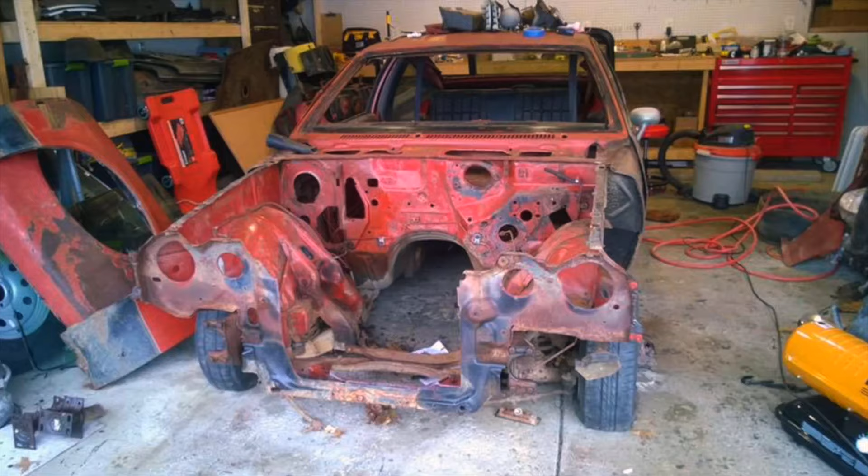And that's not the green car either. That's my Formula, which has been evicted from the garage for the moment. Don't look at Granny's pad. And well, hey, no green car in here either.

So if you've been following me for any length of time, you know this garage has been kind of an ongoing project, and finally the drywall's up, first coat of tape and mud is in. Hopefully it'll be done in the next few days here, and then we can get out here and paint.

But where's the green car? Well, Bill's still down at Bill's. I'm up here in Northeast Ohio. Bill is down in Tennessee, about 9 hours from me, and he's continued to work on the project. So thanks to Bill, the car is making some progress. This is just kind of a little intro video for what Bill has gotten done. He's got the headers in, and he made the transmission torque arm transmission crossmember piece. So without further ado, I'll send this over to Bill and he'll tell you the update.

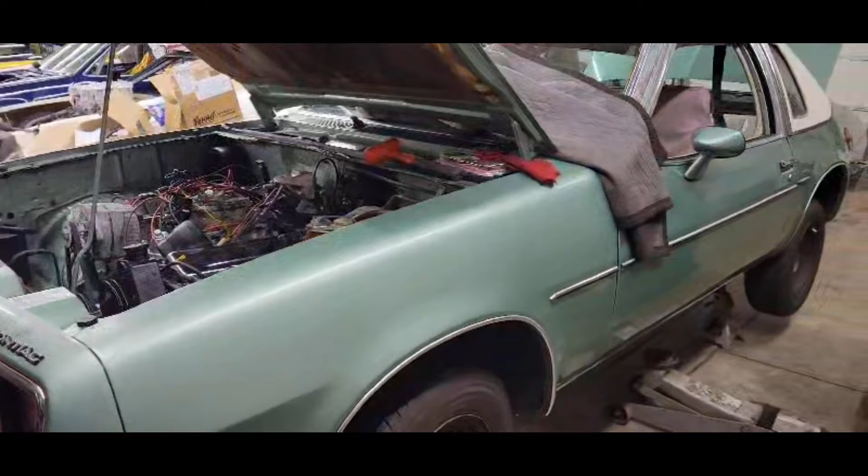All right, everybody, here's a little update on Kevin's high school car rebuild. And I know we were calling it Oscar because we were looking for something green, but I think we've changed her name because she's a she, so we went with the only other obvious green she I could think of, which is Fiona, Princess Fiona from Shrek. So it's perfectly ugly and a great name for this car.

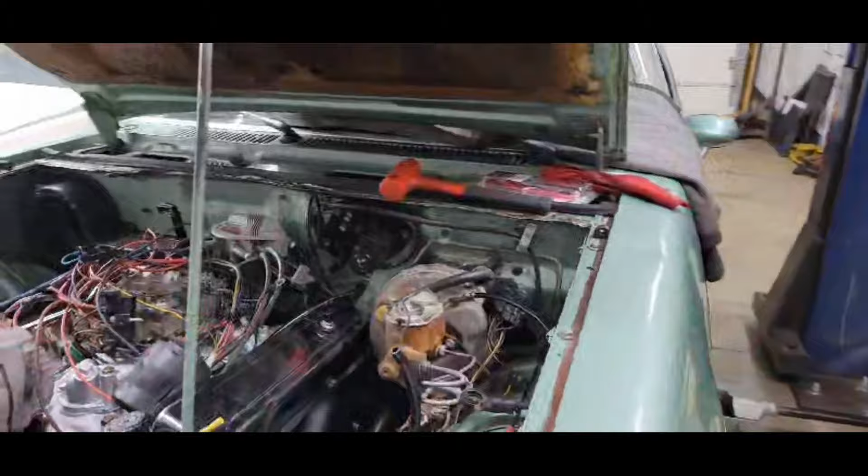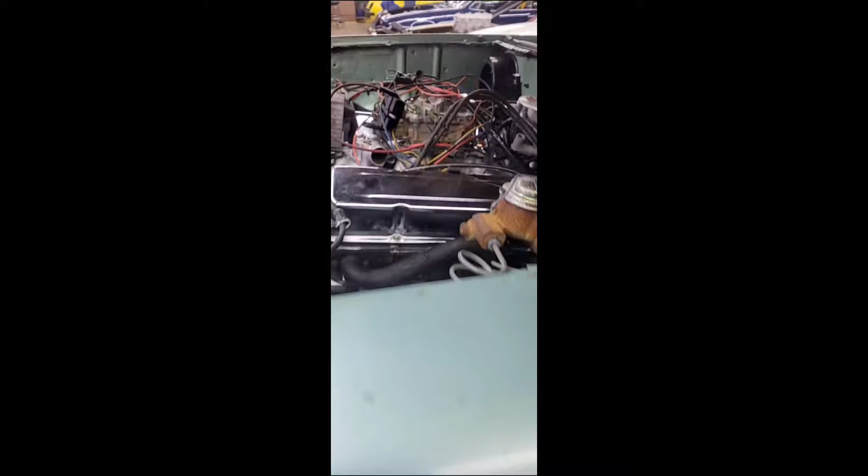So with that, I want to give a quick update where I'm at. After fighting and fighting and fighting, I have successfully installed the headers on both sides. They're in there. It's on. But I got it. These are horrible to install.

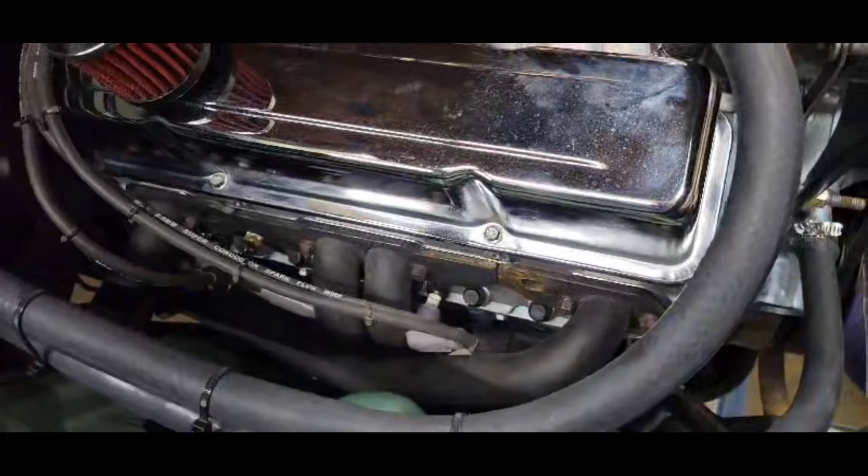Never recommend anybody ever use these headers ever again. But Kevin had these on his car in high school, so he wanted them back on his car, and I understand that, I can respect that. But the headers are on. I've got the heater hoses on, as you can see. I got spark plugs on this side, wires are back on this side.

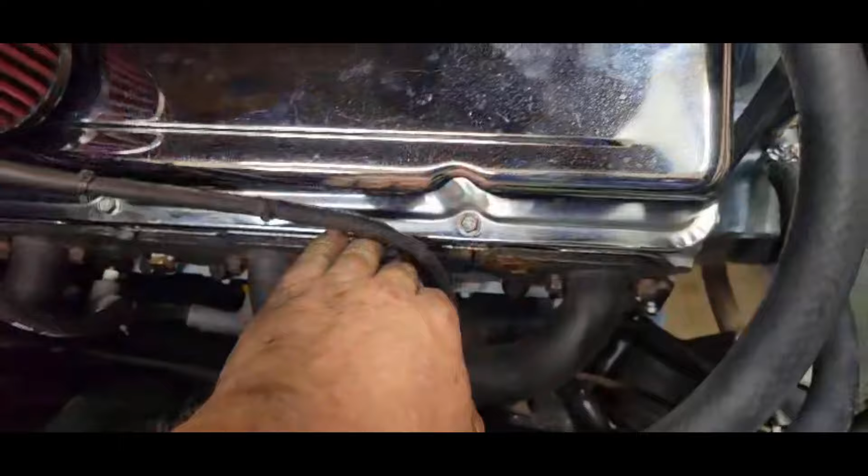I do have to come up with a clamp of some kind to attach it over there, so I can move the front of the breather here. The breather's in the way. I wanted to come around the other way, I just have to fool with it. But I'd like to have it attached to maybe this bolt here with a clip so that they don't touch the headers as much as I can stop.

And what else did I get done? I got the transmission cross member in. That's another video, so I will leave that out of this comment for this quick little video. But I'm working now on, I also got the motor mounts in.

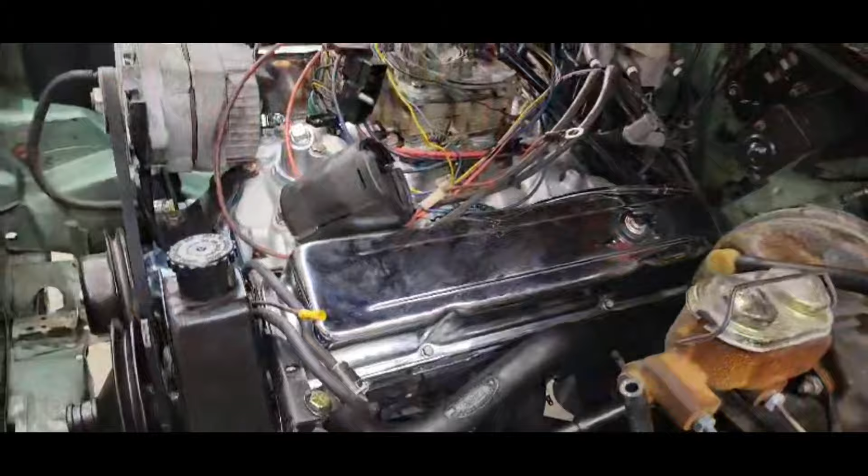I had to take them out to get the headers in. I also had to take the steering box out. I didn't have to, but I thought I did. So I got the steering box back on, the steering arms back attached. That's back together. The motor mounts are in on both sides. As I said, the transmission is in. The cross member is in.

So it's coming along. He's got me some more parts came in. I got the gauges and a gauge mount, so I need that to fill the holes, and I really don't want to start it up without knowing the oil pressure and the water temperature are accurate. Let's do it right and do it once. Needs to do it anyway, so let's just do this.

So I'm going to probably put those right here above, below the radio, between the radio and the shifter. Maybe they'll have to go over to the left a little bit more, but I like them over there. It's easier to see there. So that's the plan for that. Might start tackling that later.

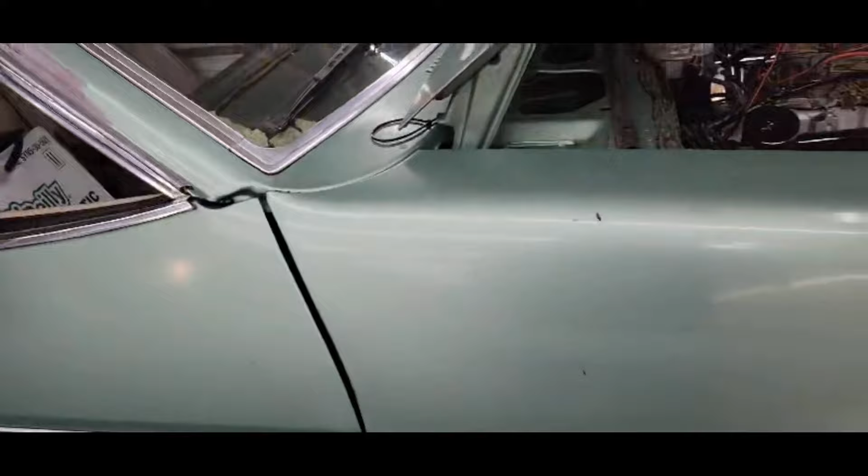I still have to put the drive shaft in. Like I said, I got the cross member in, but it's going to be the next video. So with that, I'm going to end this video, and we're going to start the next one.

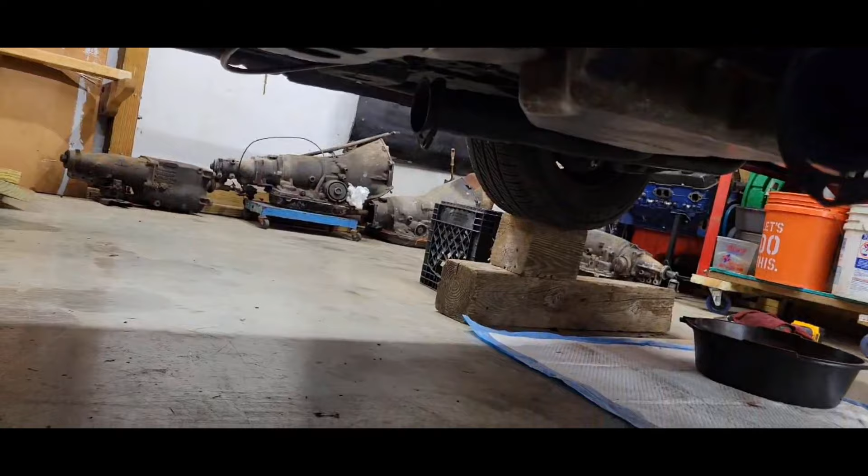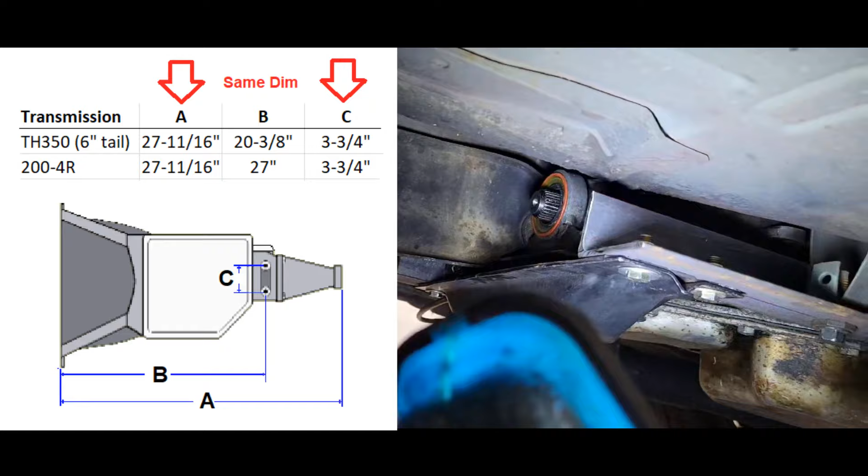Okay, back to the transmission cross member. Now, basically, I'm going to give you a quick lesson. The 200-4R is what we put in here, and from bell housing to tail housing, it is exactly the same length as the 350 — the Turbo Hydromatic 350. And of course, my compressor kicked in.

I just realized I really need to explain this torque arm mount a little bit better than what I did. That torque arm up in there.

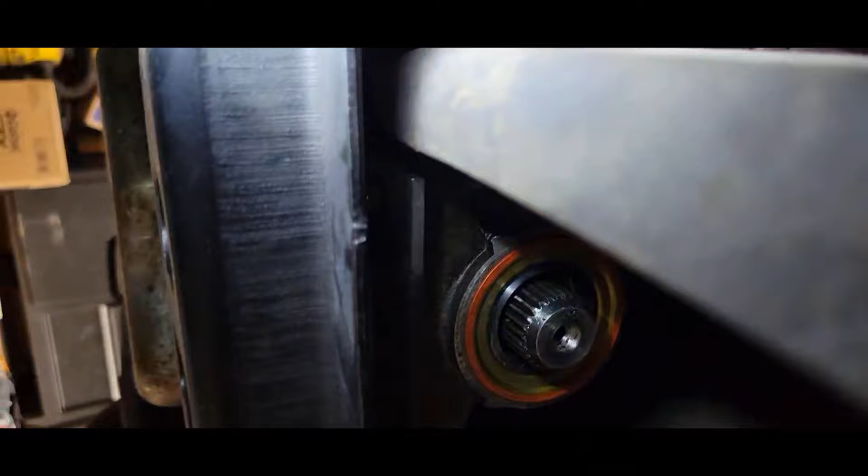Trying to get better lighting in for you.

See how that's mounted? That bracket where the bolt goes through the torque arm - normally the bolt goes from the transmission to it, and the nut goes on this end basically, and the bracket's all reversed, and this goes to the transmission. It's hard to film this.

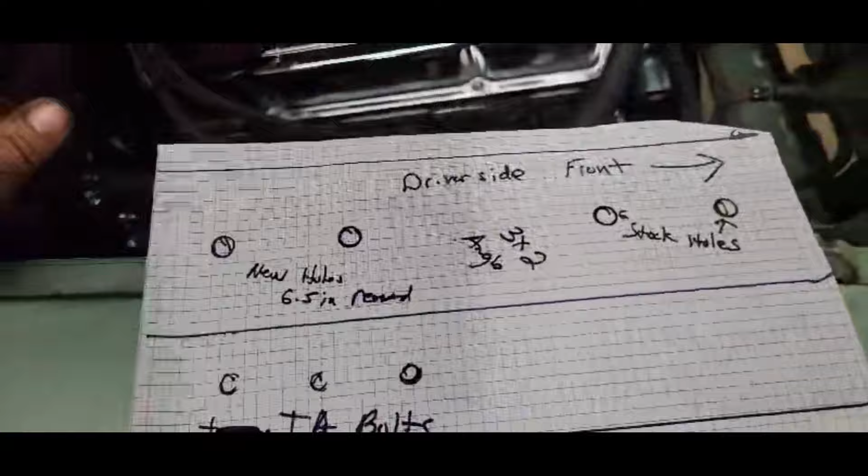It's hard for you to see that, I'm sorry. But it basically goes - I'm going to redo this. Okay everybody, I'm going to try to refilm this again. I just started to film and my compressor kicked on, of course, just the way timing always works.

Okay, what I'm going to talk about tonight is installing a 200R4, a 4R, whatever you want to call it, into an H-body. Now it is exactly the same length as a 200, a Turbo 350, or a 4-speed. They're all the same length.

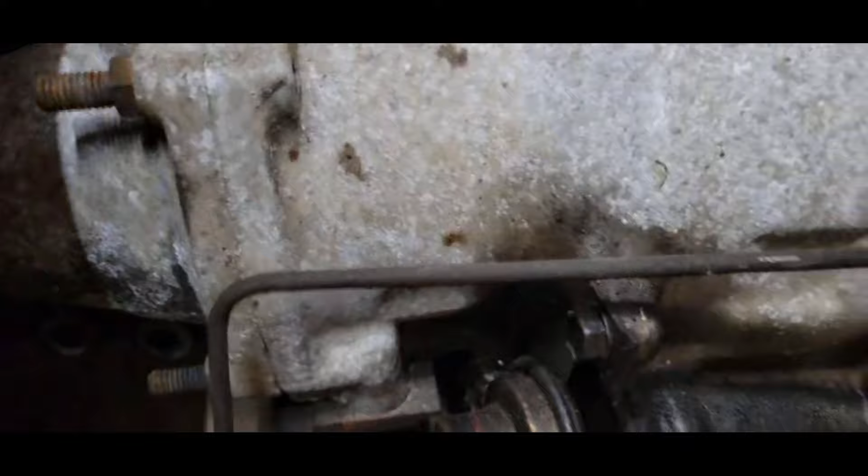So the problem is the mount is further back - much further back on the transmission. On a Turbo 350, the mount is here, right here. Here's the Turbo 350, so you can see the mount is in front of the tail housing. On the 200R4, it's back here, all the way towards the tail housing, which I'm going to show you now.

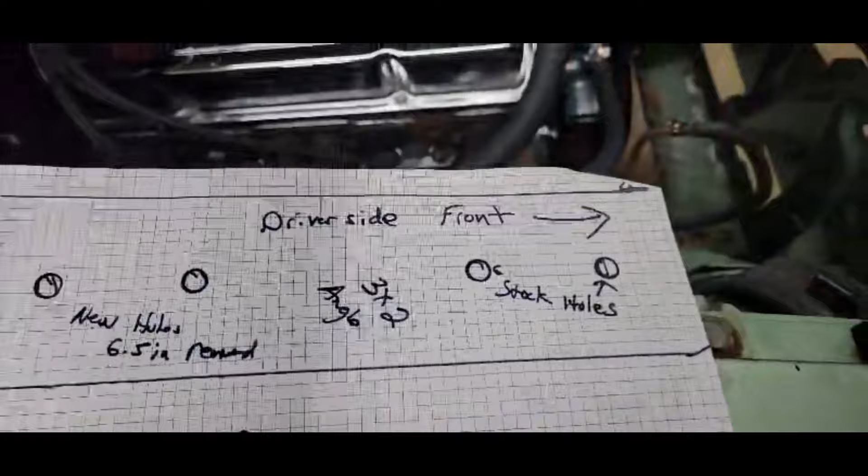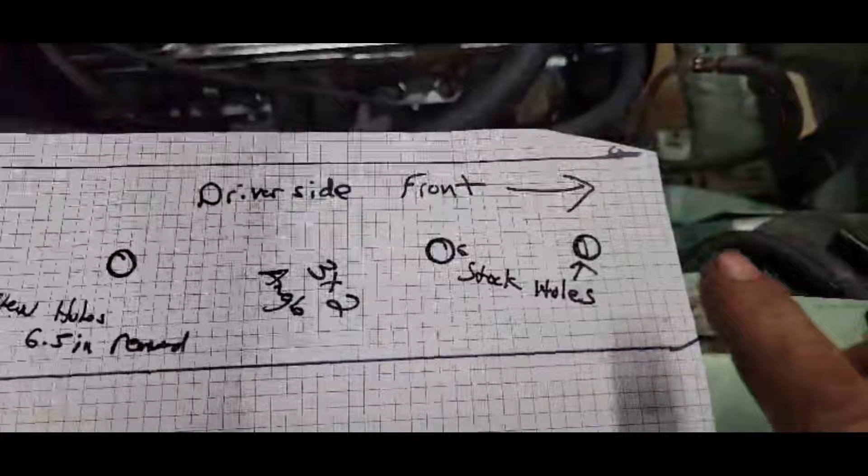So that's one thing I wanted you to understand, why we have to do what we're doing here. So I have created a nice template. This is basically going to move the stock cross member back 6.5 inches. So these are the holes for where the factory cross member were.

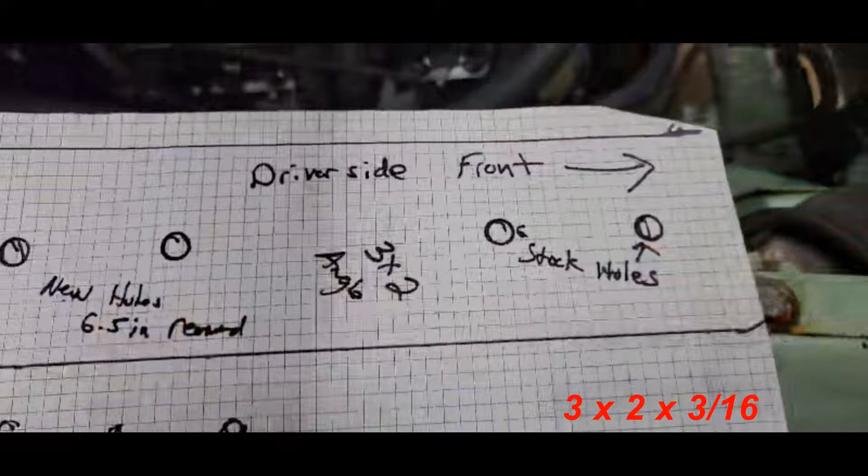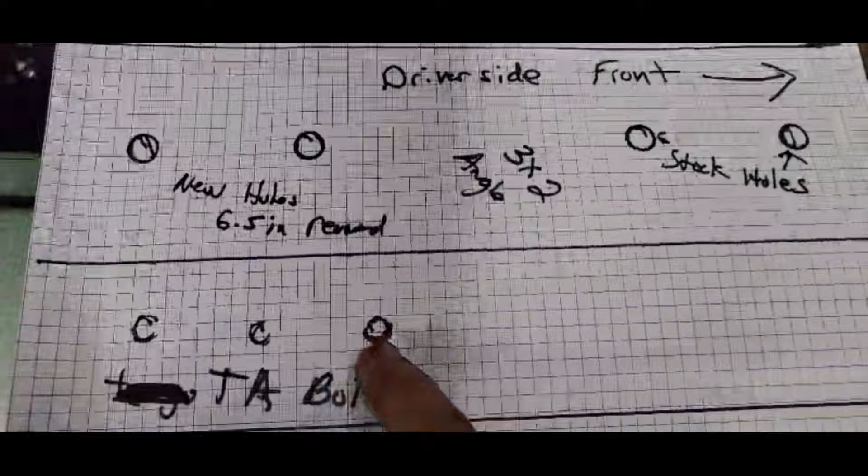So we moved the cross member back to this location using 3-inch by 2-inch angle iron, so this is 2 by 3. This should be bent - I didn't bend it because I don't want it bent, so to say, but for template reasons. But here is where you mount your torque arm.

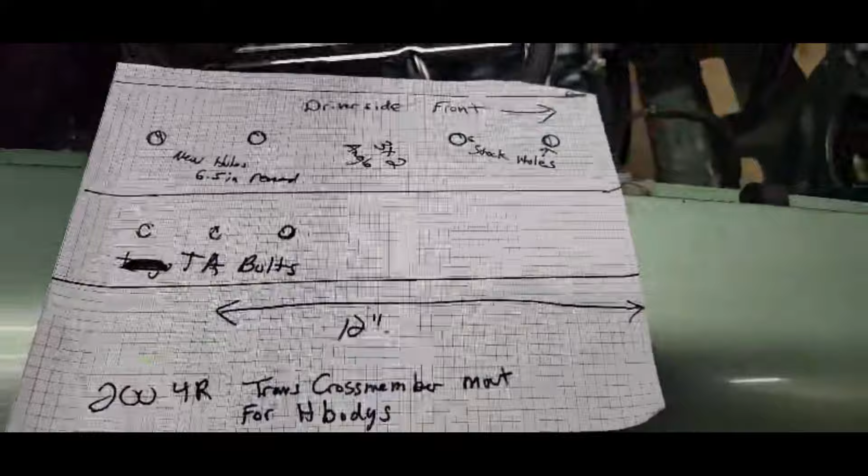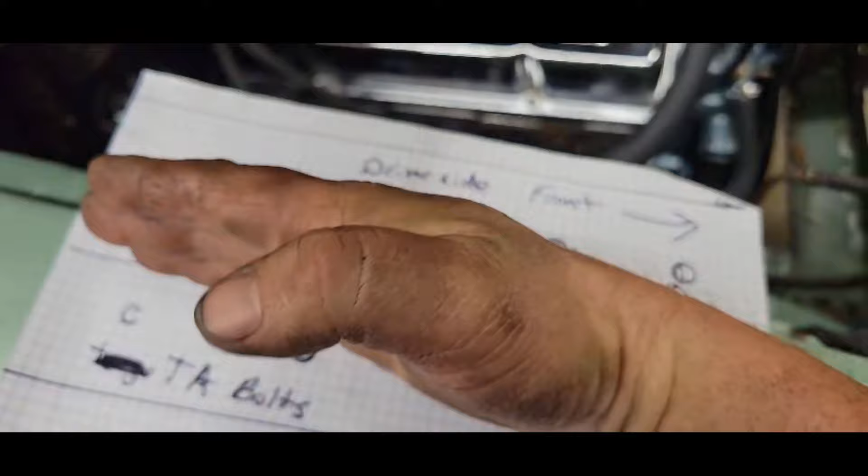So what you're going to do is basically take the bracket off the transmission, where it bolts with the 3 bolts to the bell housing. Take that bracket and flip it around, so now the flat end sits against the bracket here. Instead of mounting on the transmission, we're mounting it on the angle iron right about here, which I'll show you, just to give you an idea.

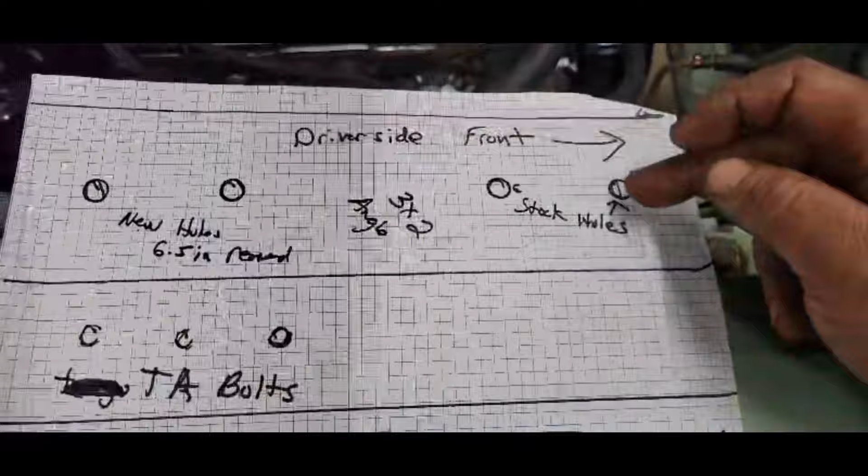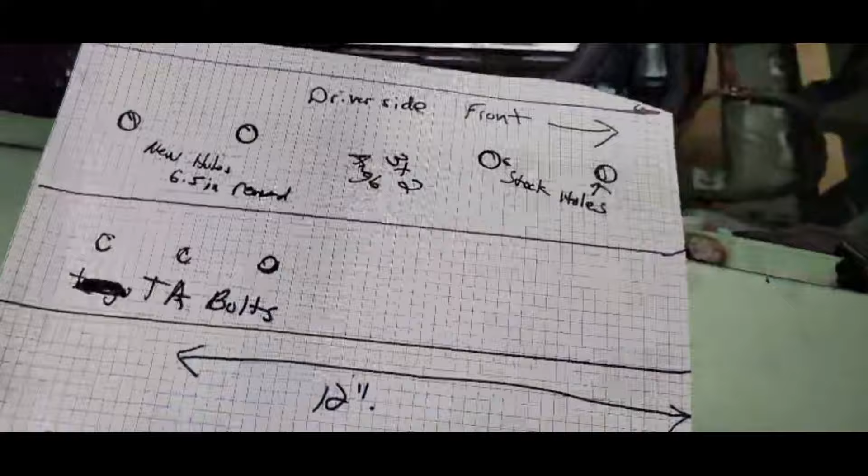And also I want to tell you, on the other side it's basically exactly the same - we're talking 1.5 inches out, an inch back, and then 6.5 inches back on each hole. That's not that difficult to do. I will gladly get anybody a copy of the template that wants it - just contact me and I will be able to help you, or ask Kevin and Kevin will get you in touch with me.

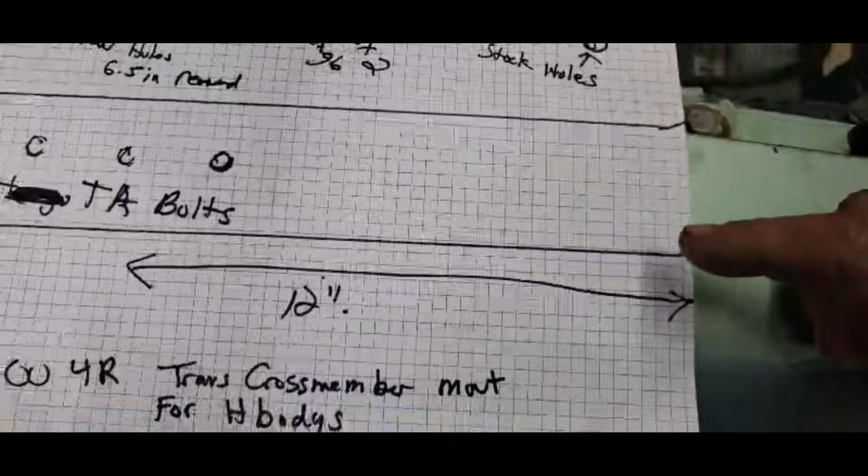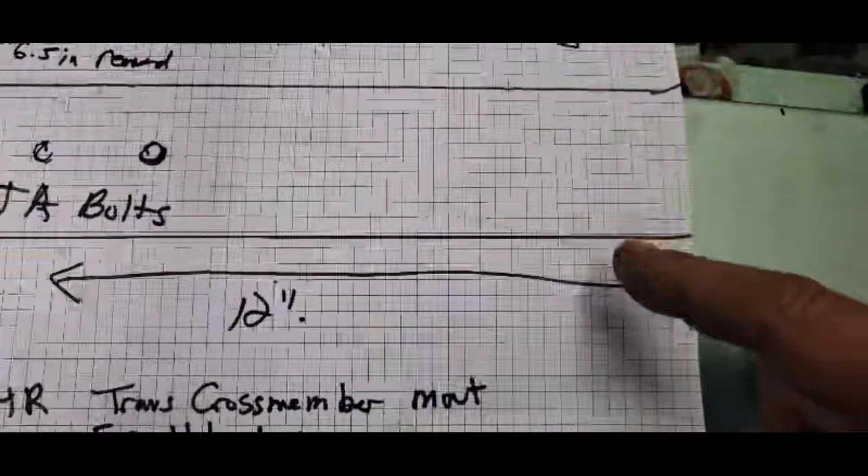But on the passenger side, basically the bracket's basically the same, except you're 2 inches on this side versus 3-inch on this side, okay? So on this corner, we have to lop off this part and this corner of it. There's just not enough room.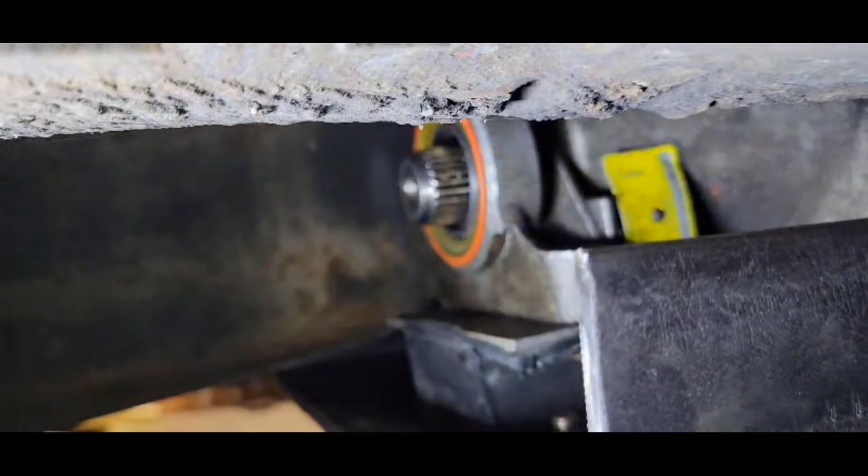I hope that helps everybody understand that. So it's pretty easy - basically what we're doing is using the angle iron to move the stock cross member back further. Can you see that? Just basically slide it back. Same thing on the passenger side, slide it back. I'm trying to do the best I can with this camera work, it's really difficult, but you can see better how I cut that corner off there.

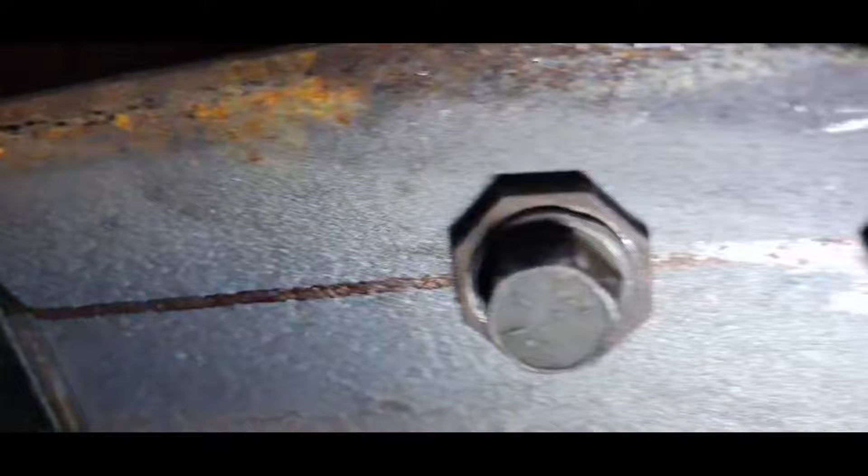It looks a little better in this video, but basically that's all there is.

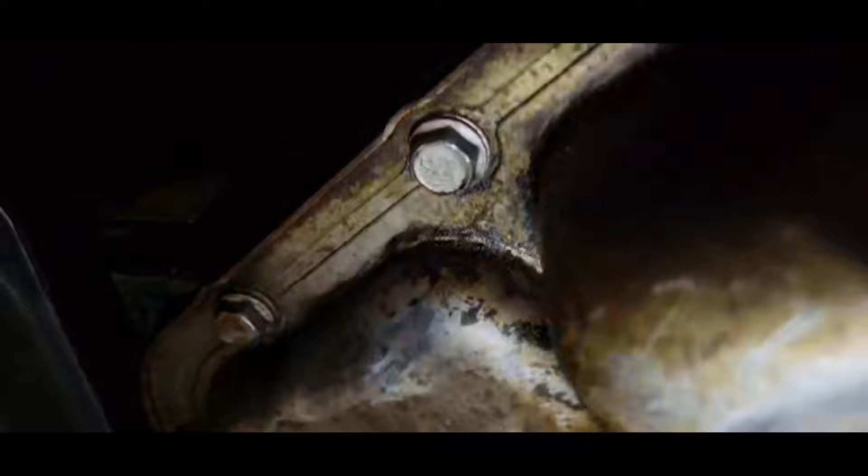And if you ask me how did I get the speedometer cable, I don't know yet - I have not done that. I have the same brackets on my car that I've been using for 6 or 7 years now, and it works fine. I don't have the speedometer cable hooked up, but I think I'm going to have to put a hole somewhere in here in the cross member and run the cable through that hole, which is going to be fun, but it's doable.

It's all doable. I might have to make a plate to add on it. When I get to that, I'll let you all see the video on that too, because I'm thinking about making a bracket to go over the top, possibly, to make that angle iron a little stronger.

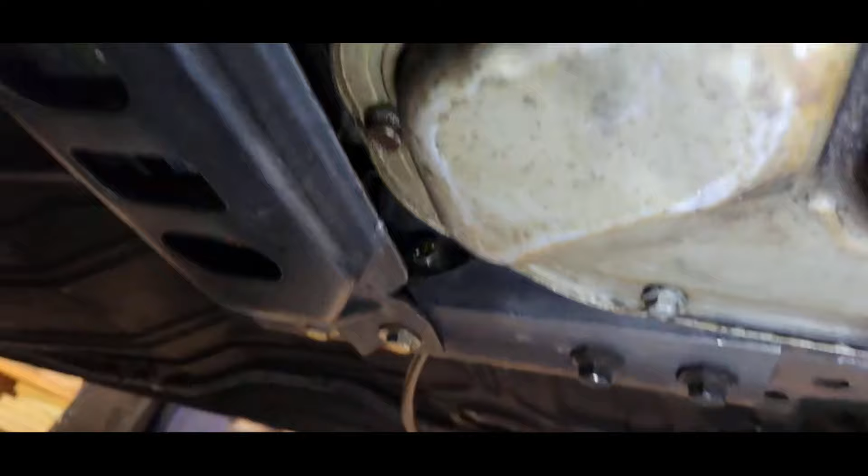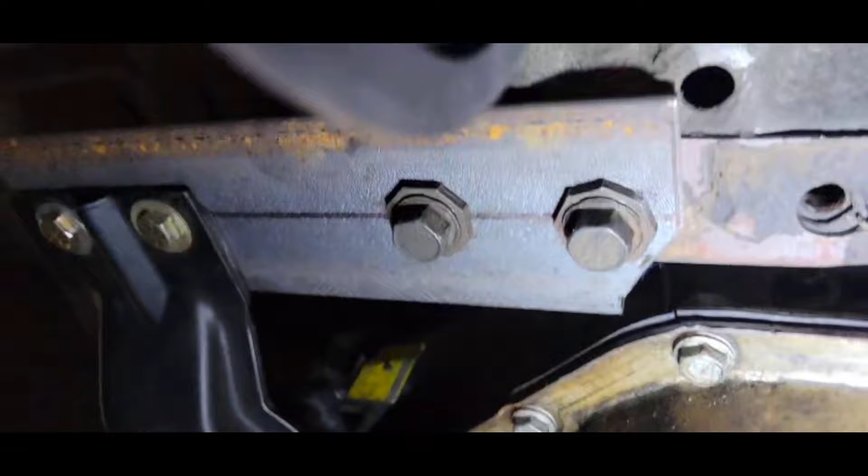I've been thinking about it, I just don't know how I'm going to do it yet. So I hope that helps you guys get an idea on how to do this. This is the best I've been able to get a video of this so far, so I hope you see what I did. Stock cross member - instead of all this custom fabrication, it's just two pieces of angle iron. It's really, really simple. Stock bolts go right in the holes and then you're done. Doesn't take very much.

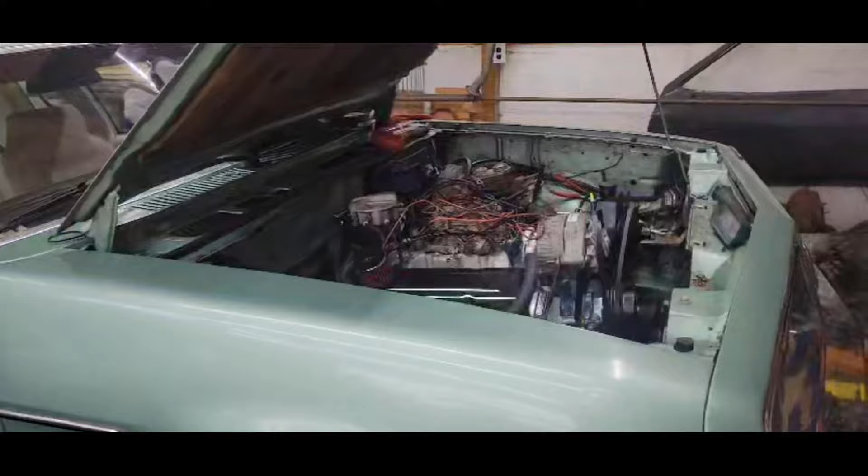Second reason, the car was in Alabama, so it had to come halfway anyway. And we decided it was easier to just have him come to me and have me do it, because I have the room and the equipment to do it all, and the knowledge, of course. But it just made sense. So that's why it's here and not at his garage.

So with that, he wanted to show what was left to be done. As of right now, I've got the engine pretty much in. The headers are in, the transmission cross member is in - I showed you a video on that. I've also got a lot of little stuff starting to get taken care of. Power steering pump and hoses, I was working on that the other night, and I was tired from work all day, so that's pretty much at a stop at this point. But so what's left now to do?

Dipstick tube, spark plugs, wires on this side. They go down on the bottom, around the bottom of the engine, and come back up. So that's something I got to crawl under the car to do. So the spark plug wires to do.

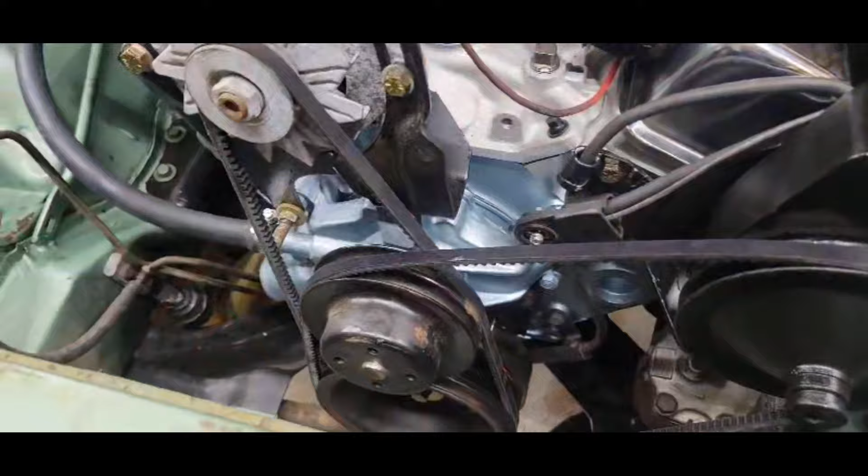The radiator, the heater, upper and lower hose, of course. Finish mounting the power steering pump, fan, electrical. I did get a Ford starter solenoid to install over here - that came in, I got that yesterday, so that'll get wired in. I've kind of been holding off until I get the parts.

I've also got the gauges, which he sent, so I will need to put them in to block off all the holes that they have. Of course, we don't want a big oil leak and a coolant leak, so they have to go in. Not much left on this side, except for moving those spark plug looms and wiring up everything, and vacuum lines and little stuff like that.

It's close. And frankly, I'm only going to get it as close as it can go till it's ready to fire. And then we'll leave it be till Kevin can come back down so he can hear it fire for the first time. That's the right thing to do, is have it ready to go and let him hear that.

Still got to do drive shaft. I still have to do speedo cable, shifter cable, all that kind of stuff still needs to be done. Fluids, inspection cover, but most of it's done. I mean, it's in the car.

So yeah, I just wanted to give you the reasons why it's here and not at his house. And it just makes sense. I have the room, the time, and the ability to do it where he really doesn't have it right now. So, and he wanted the car done, so we can have it, shake it down a bit, and have it ready for next year's Power Tour. It's Plan A. As most people know what Power Tour is, Plan A is doing pretty good.

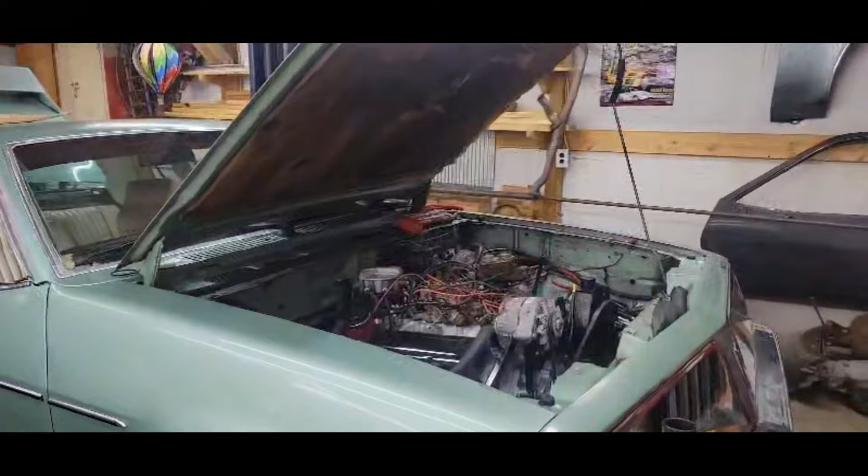All right. We'll talk about this more when I get another day's worth of work done, which will probably be tomorrow. Today I'm going to take care of my lawn, which is getting extremely tall, so that needs to be done. So this maybe I'll play with tonight or tomorrow, but we're going to stop there.